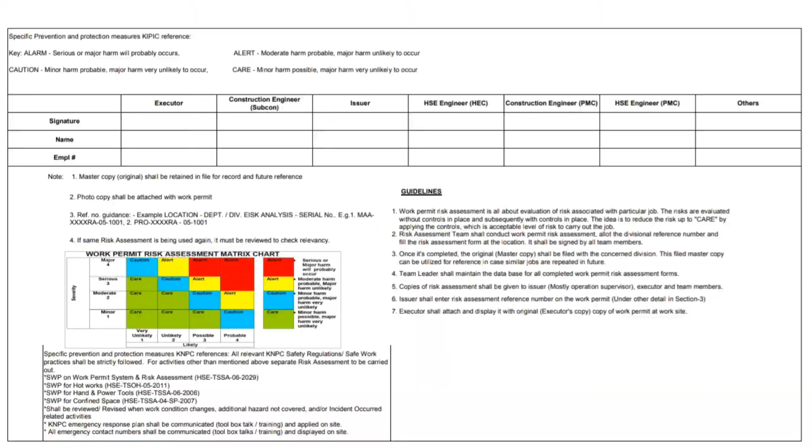Risk assessment for confined space works. Static equipment. In this video I am splitting the A3 paper for the convenience of the viewers.

Welding, fit-up, cutting and grinding and power tools operations. Hazard: hot works. Non-compliance to permit to work (PTW) system. Lack of communication. Unskilled employees handling power tools. Fire. Burn. Exposure to ultraviolet (UV) and infrared (IR) rays.

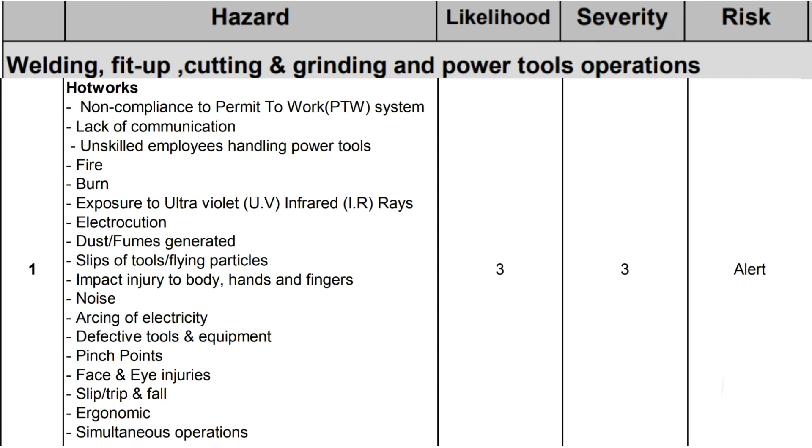Electrocution. Dust, fumes generated. Slips of tools, flying particles. Impact injury to body, hands and fingers. Noise. Arcing of electricity. Defective tools and equipment. Pinch points. Face and eye injuries. Slip, trip and fall. Ergonomic. Simultaneous operations. Safety precautions.

1. Obtain valid work permit, with approved method statement and risk assessment prior to commence activity. 2. Supervisor must ensure that all work activities are carried out by competent and trained personnel. TBT/TSTI shall be conducted before start of activity. 3. ELCB rated 30 mA system in place for electrical power sources.

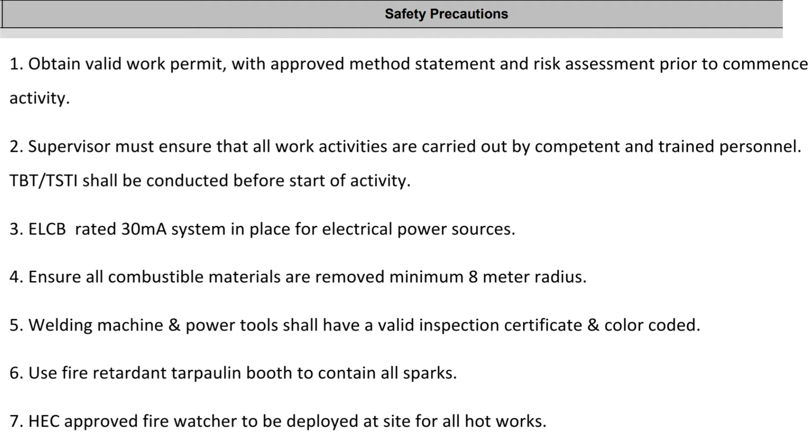4. Ensure all combustible materials are removed minimum 8-meter radius. 5. Welding machine and power tools shall have a valid inspection certificate and be color-coded. 6. Use fire retardant tarpaulin booth to contain all sparks. 7. HEC-approved fire watcher to be deployed at site for all hot works. 8. Sufficient number of inspected and certified fire extinguishers to be provided.

9. Keep the argon cylinders secured with chain and upright position on the trolley secured to a fixed structure. 10. Cylinders must be segregated and stored properly. Shall have valve caps, with proper label of the contents full or empty. 11. Cylinders shall be protected from unauthorized use or operation while user is out of sight, that is, user working on height and cylinder sets are kept on ground level. 12. Always close the cylinder's valve when not in use. Do's and don'ts to be generated for such and to be briefed among workforce.

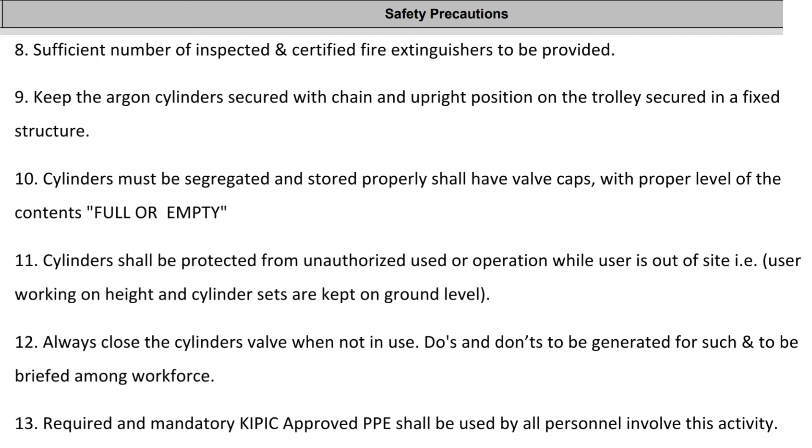13. Required and mandatory KIPIC approved PPE shall be used by all personnel involved in this activity. 14. Expired and wet grinding wheel shall not be used for any grinding, cutting activity to prevent injury from flying break-out parts from the grinding wheel. 15. Ensure that the pressure dead man switch of grinding machine is working properly and no lock system for continuously locking the system in on position. 16. Grinding machine wheel shall be safeguarded and ensure grinding wheel RPM is equal or greater than grinding machine RPM. 17. Ensure that the equipment and tools to be used are inspected and in good condition.

18. Use dust-free power tools that are equipped with a vacuum. 19. Ensure that chipping power tools are equipped with auxiliary handles to maintain control. 20. Make sure dead man switch is available on power tools. 21. All hazardous waste generated such as used welding rods and grinding, cutting wheels shall be collected in proper bins and shall be disposed as per KIPIC waste manifest procedure. 22. Shall use radiation filtering welding glasses to protect from optical radiation produced by the welding, such as the intense ultraviolet light produced by an electric arc.

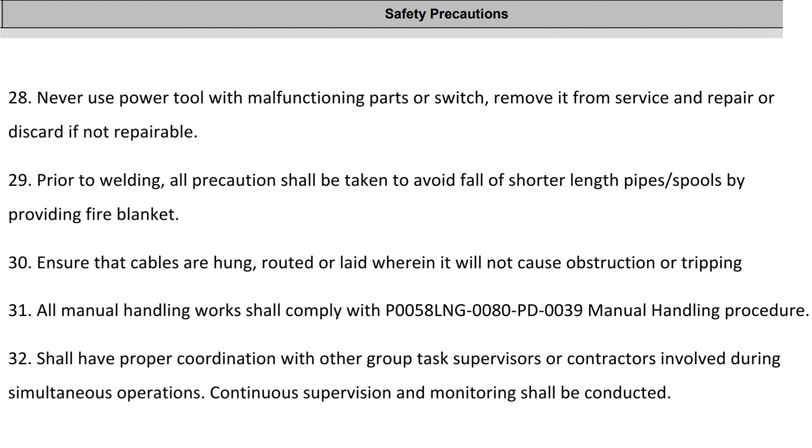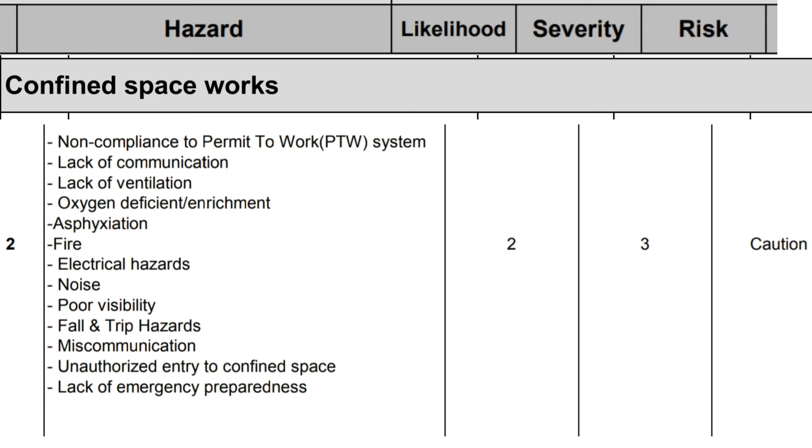Confined space works. Hazard: Non-compliance to permit to work (PTW) system. Lack of communication. Lack of ventilation. Oxygen deficiency, enrichment. Asphyxiation. Fire. Electrical hazards. Noise. Poor visibility. Fall and trip hazards. Miscommunication. Unauthorized entry to confined space. Lack of emergency preparedness. Safety precautions.

1. Entry into all confined spaces shall be permitted only with the confined space entry authorization, unless the space is reclassified as confined space not requiring entry authorization. Subject activity falls under Greenfield, hence, referring to Clause 9.2 of Safe Working Practices on Confined Space Entry, contractor has to prepare the confined space entry site-specific and task-specific analysis, which shall be submitted along with the present hazards, precautions and waived items for company approval.

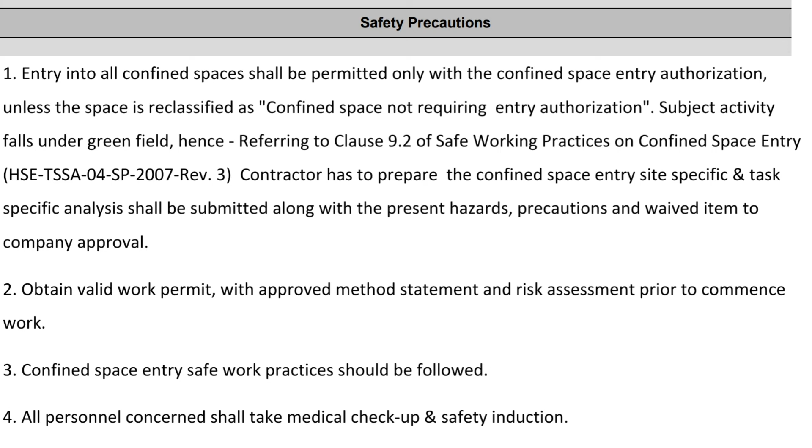2. Obtain valid work permit, with approved method statement and risk assessment prior to commence work. 3. Confined space entry safe work practices should be followed. 4. All personnel concerned shall take medical checkup and safety induction. 5. Calibrated and valid certified gas tester and portable detector shall be used. 6. Confined space, do not enter signage shall be displayed visibly at the entrance of any confined space. 7. Establish specific rescue plan and rescue equipment identified available to effect a rescue in the confined space. 8. TBT/TSTI shall be conducted among workers for awareness.

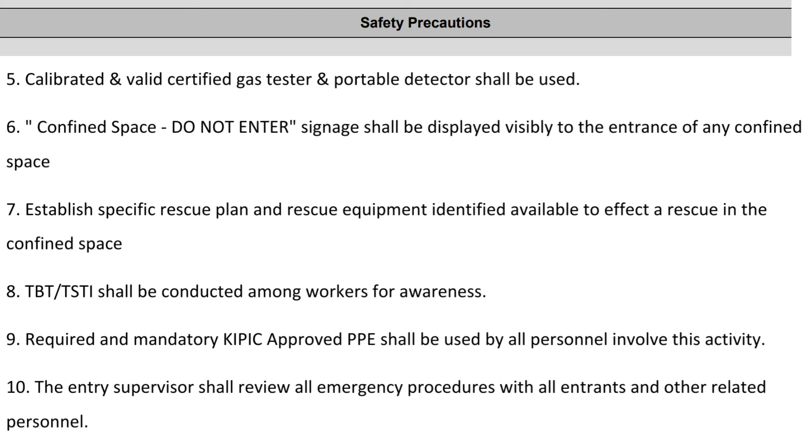9. Required and mandatory KIPIC approved PPE shall be used by all personnel involved in this activity. 10. The entry supervisor shall review all emergency procedures with all entrants and other related personnel. 11. Verify and monitor the atmosphere by means of gas testing before commencing work. Gas testing must be done before and during the entire activity to measure oxygen level and to find out presence of other hazardous gases. The testing must be done by authorized gas tester.

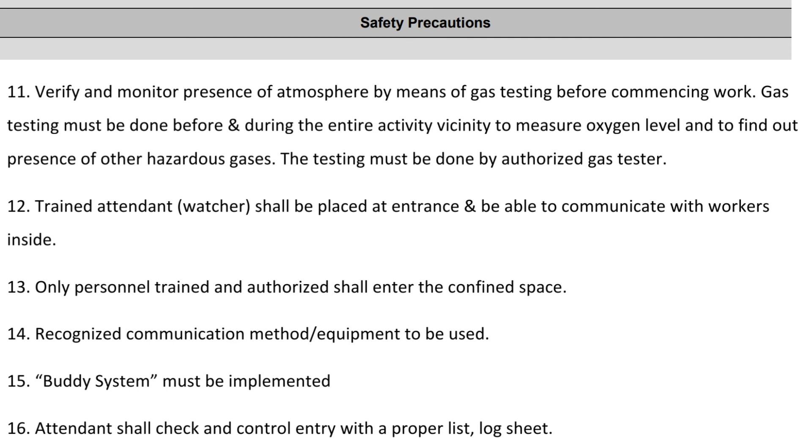12. Trained attendant, watcher, shall be placed at entrance and be able to communicate with workers inside. 13. Only personnel trained and authorized shall enter the confined space. 14. Recognized communication method, equipment to be used. 15. Buddy system must be implemented. 16. Attendant shall check and control entry with a proper list, log sheet. 17. Ventilation facility shall be equipped to ensure adequate airflow. 18. Sufficient lighting shall be provided. 19. Hearing protection apparatus shall be worn. 20. Ground cable shall be installed. Cable and hoses shall be properly routed.

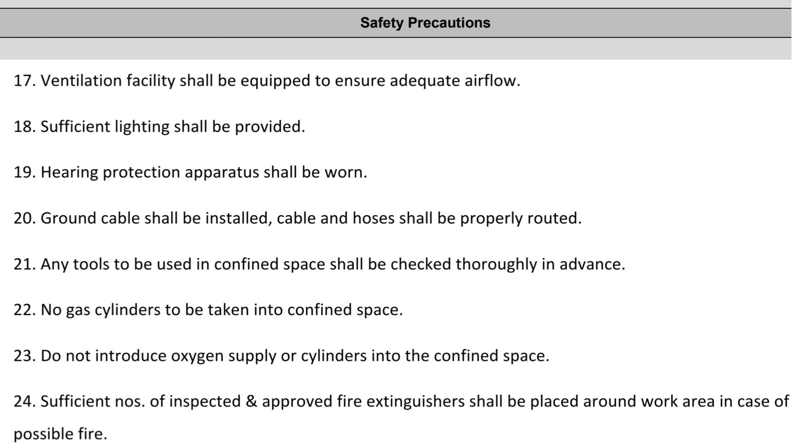21. Any tools to be used in confined space shall be checked thoroughly in advance. 22. No gas cylinders to be taken into confined space. 23. Do not introduce oxygen supply or cylinders into the confined space. 24. Sufficient number of inspected and approved fire extinguishers shall be placed around work area in case of possible fire. 25. Maintain good housekeeping and use proper access to prevent slip, trip and fall. 26. Workers must be provided with frequent rest breaks and job rotations. 27. Ensure that confined space entrance is blocked closed with hard barrier and signage if there is no work.